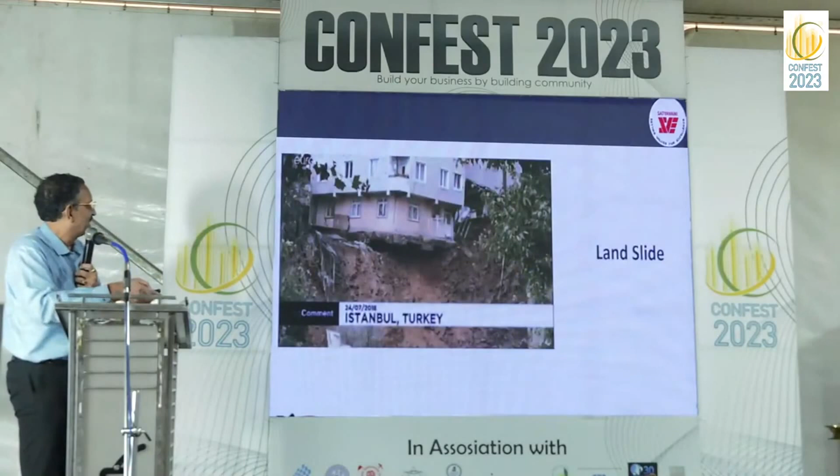Next is the landslides. When there is a landslide, if we don't tackle the landslides basically, though the structure is resilient, it will not stay. And next, the best example of resilience in the world is the Leaning Tower of Pisa.

Though it is not designed for such settlement, the tower has got the inbuilt resilience. That's why it is surviving even after the settlement beyond the design. So this is the example of resilience. And then we see earthquakes. Most of the buildings, though not designed, survive the earthquake because of the resilience in the building, because of the, you call it the redundancy or you call it the robustness in the structure. So this is the resilience.

Next is the fire accidents. This is another thing which we don't design exactly the structures for, but structures survive because of the resilience. I'm going to give the examples of practical projects which we handled, utilizing the resilience in the structures and restoring the structural life. Next is the man-made errors during construction or after the construction. So we see the structures failing. So even for man-made errors, we have resilience in the structures. I'll be tackling that example.

And next is the cyclone, structures being not resilient. We see the failure. Terrorist attack. We have seen the World Trade Center. It has collapsed, but the resilience in the structure has helped saving many lives. You know, even after such attack, there are only deaths of 2,700, though the people in the building were more than 6,000. So many lives could be saved because of the resilience in the structure, though for a limited period.

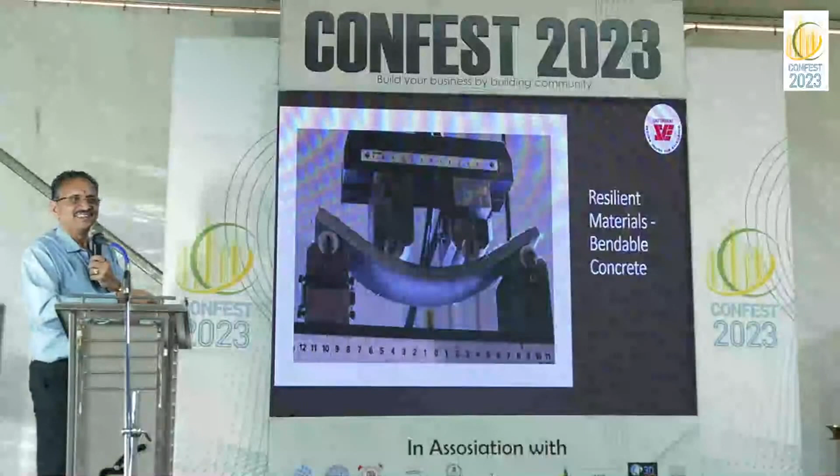This is an example of fiber reinforced concrete, how resilient it can be. A bendable concrete. This is already there, available. So we can have a concrete, that means we have the resilience in concrete. Most of the projects, most of the structures fail because of the failure in compression. We know the ultimate failure of any structure is by buckling in concrete, in compression. So that is the thing, and if we can handle that, we can handle the failure.

And some of the flood resistant materials include glazed brick, concrete blocks, glass block, and stone with waterproof grouts, and then naturally decay resistant lumbers, marine grade plywood and cement boards. These are all the materials that we can use against flood.

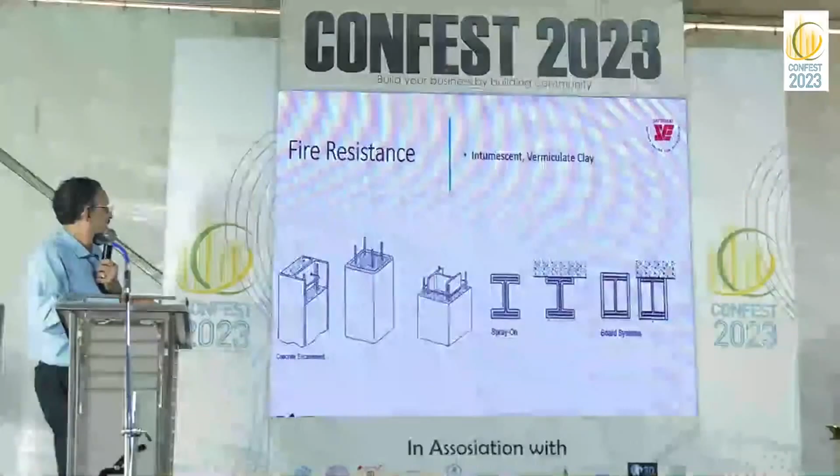Next, fire resistance. When we talk about fire resistance, it is the encased steel structure. Normally we use steel structures, but if we encase with concrete, the fire resistance will increase. And then we have the intumescent paint and vermiculite clay, which will increase the fire rating of the structure, whether it is concrete or steel. And board systems, we have the cement boards that we can cover the steel structures with to increase the fire rating.

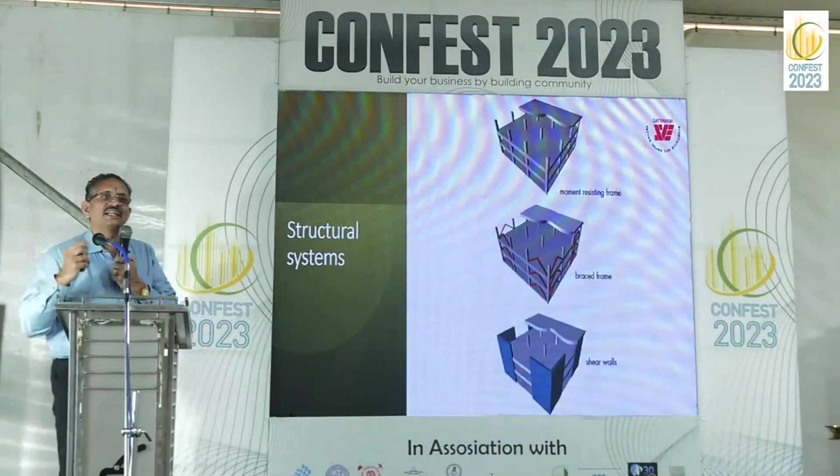Next is the structural systems. We have moment resisting frames. That is a very primitive thing; let us say if we have 10% resilience in frames, in braced frame we can get 20% resilience. Then, if we go for shear walls and core systems, we can increase the resilience to 50%. So we have to choose the structural system depending on the resilience required. This is the resilience-based design.

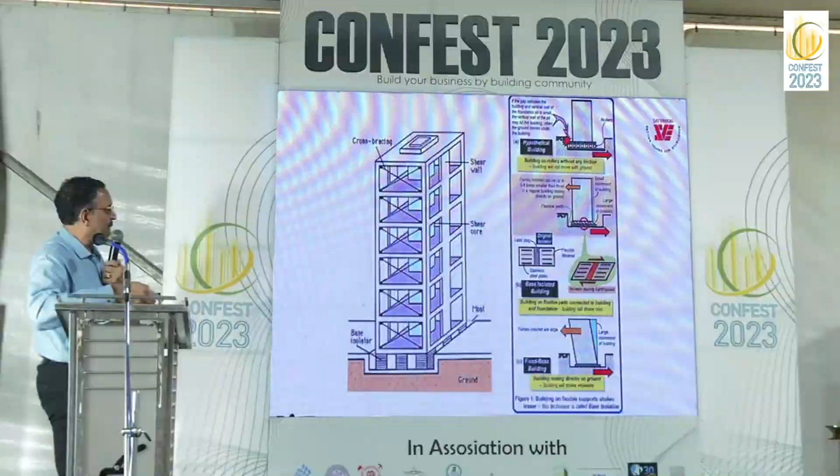Now, if we have to design any new building afresh, we have the latest technologies like base isolation, and different base isolation methods which will reduce the loading itself, and then we have the damping systems. So there are the tuned mass dampers, viscous dampers, friction dampers, and yielding dampers. So these are all available.

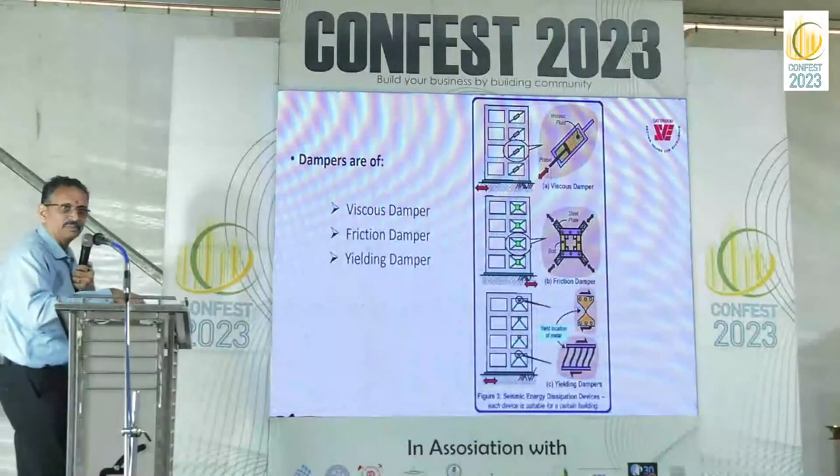I have come across in Japan a building being designed with 5 types of dampers, and retrofitting existing buildings. The same thing we can do in India also. And we are all aware Delhi is at the highest seismic hazard risk now. So we have to take measures. So next is the ductility detailing as per IS 13920 code.

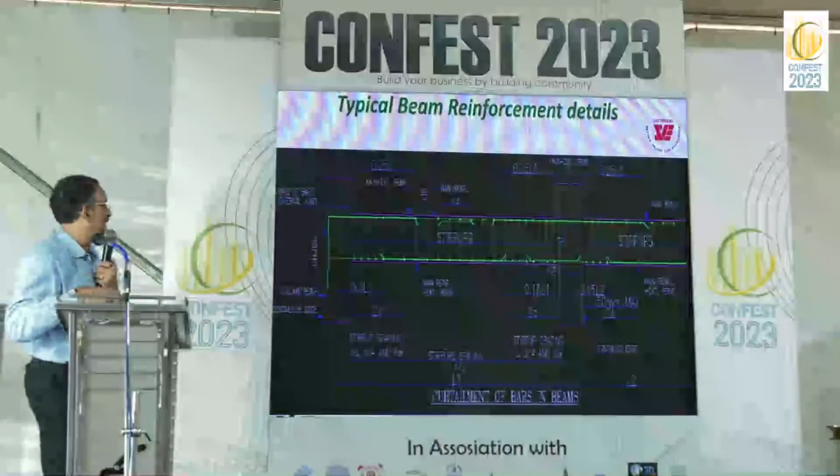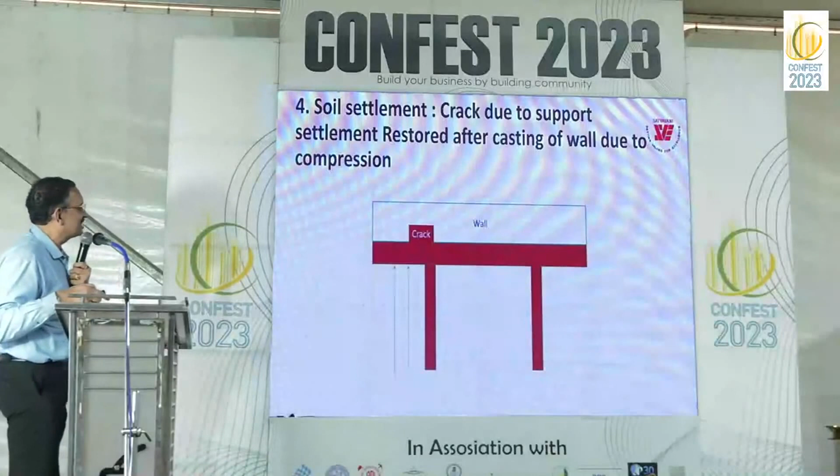And if we strictly do that, we will build in the resilience automatically in the beams and columns, the column reinforcement and detailing. Next is an interesting resilience that I have done in a project of a water retaining structure. It's an aqueduct of 1.2 kilometers, wherein we had to do 2-stage casting of concrete. One is the base slab and then wall.

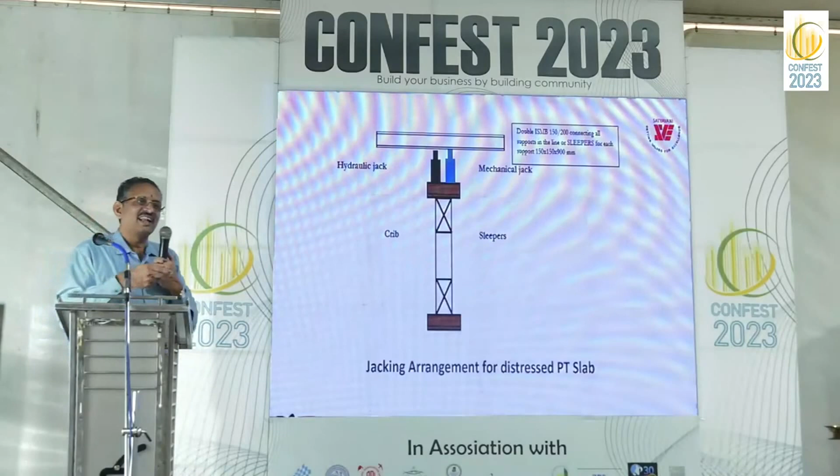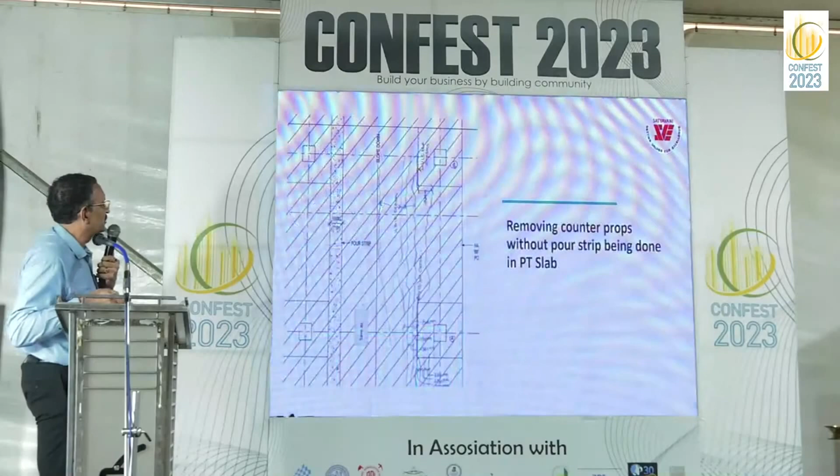So we had to restore. This is the pour strip and these are the cracks after removal of the props, and we restored that structure by jacking up. This is again resilience in structures. We could utilize that resilience and rebuild the structure. Here, sorry, I didn't explain. Here 2 levels of counterprops are there, so this removed counterprop has caused the damage. So this kind of resilience we can use, and we have restored the structure successfully.

Next is the flooding, rise in pore water pressure. This is another example which we handled in a practical case. This is the damage in the podium columns. There are 2 residential towers. In between there is a podium slab, and due to the flooding and pore water pressure rise, the whole podium got lifted. So this is the podium structure. Can you imagine this structure being lifted by almost 200 mm, 250 mm due to the pore water pressure? So this is the representation of that lift.

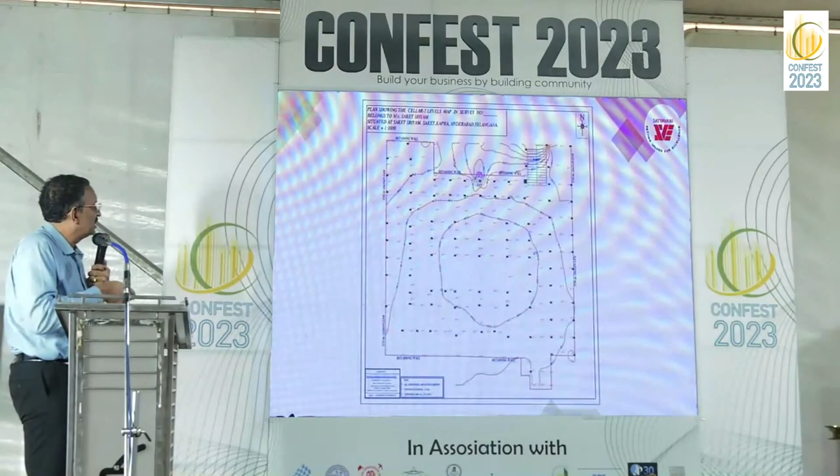And we restored this just by providing a relief well and reconstructing and restoring the damaged columns, and then the structure got restored. This is the water table study that we have done in the area, and we provided the relief well, and then it worked successfully.

In fact, can you change the slide? Next slide.

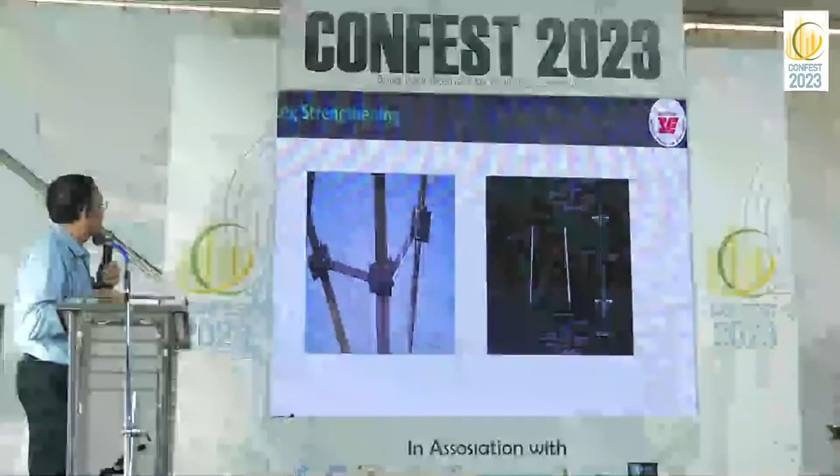So whatever recommendations we have given have become part of IS 875, now 2016. The narrow front wind and coastal wind zone. Now IS 875 has incorporated a coastal wind zone. So the structures that we design in coastal areas require separate design criteria. And these are all the strengthening measures we have done. And this is the strengthening of the bracing in the towers. The foundation is an unhealthy base; it is better to do the strengthening.

So review the design criteria and construction practices, coastal zone, narrow front wind and survival speed, minimum depth of foundation and plinth height we have revised, retrofit existing critical infrastructure for community resilience, prepare hazard mitigation plan periodically. This is our recommendation. Adopt from other similar zones.

Like we know that this climate change will affect the wind speeds and flooding. We have to keep changing that basis and make pre-monsoon inspection of structures mandatory. You know, we have seismic qualification of the structures to be done once in every 5 years. That is a mitigation measure for seismic resistance.

Same way for cyclones also, we have to do the pre-monsoon inspection. Strict adherence to CVC norms, Central Vigilance Commission, in quality. So these are our recommendations. Finally, the terrorist attack. And one more important thing I want to suggest for the cyclone.